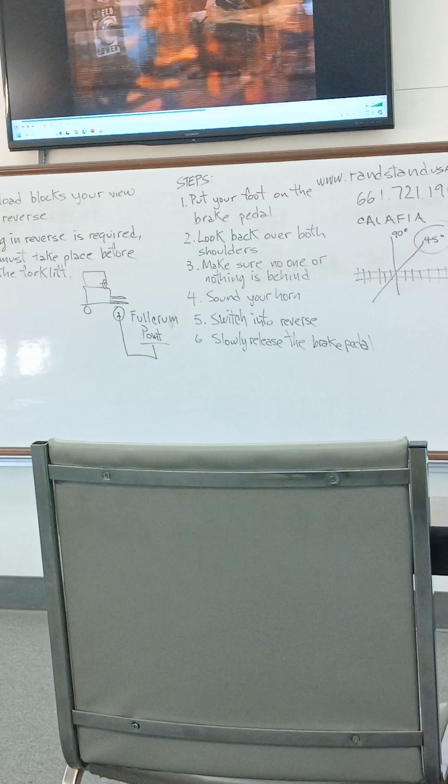Forklift equipment operators must be trained and authorized by the company. Once you're trained, evaluated, certified, and authorized, the rest is up to you. You're expected to have the maturity and responsibility to operate this equipment efficiently and safely.

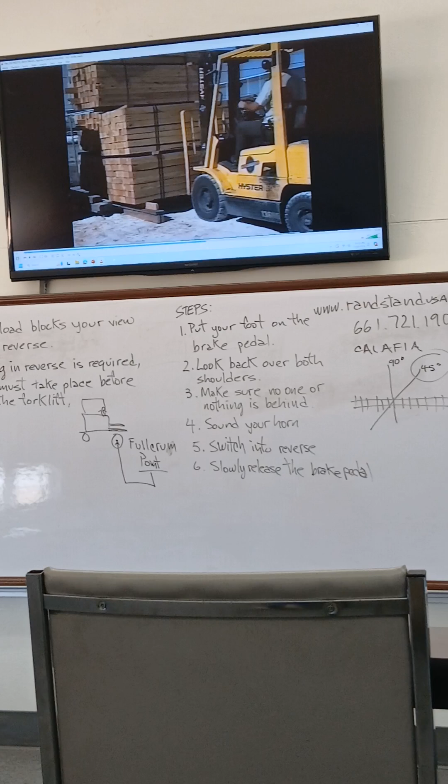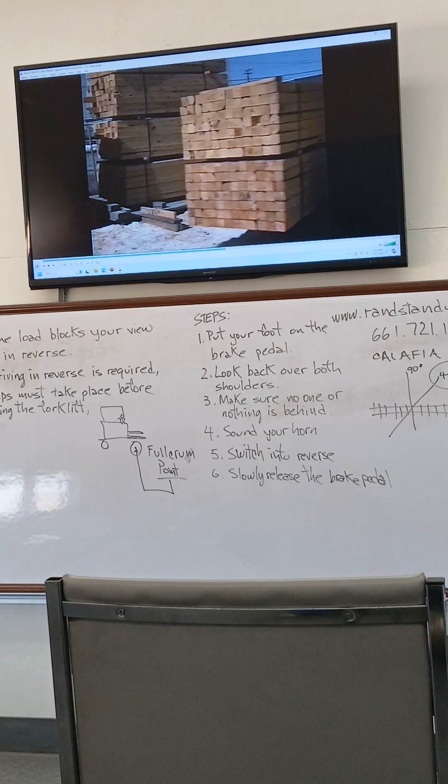Again, we can't cover every forklift safety rule, but let's explain some basic safe operating rules to provide the basics upon which to build a professional understanding of forklifts and forklift safety rules. Always follow your company's forklift operating procedures, policies, and rules.

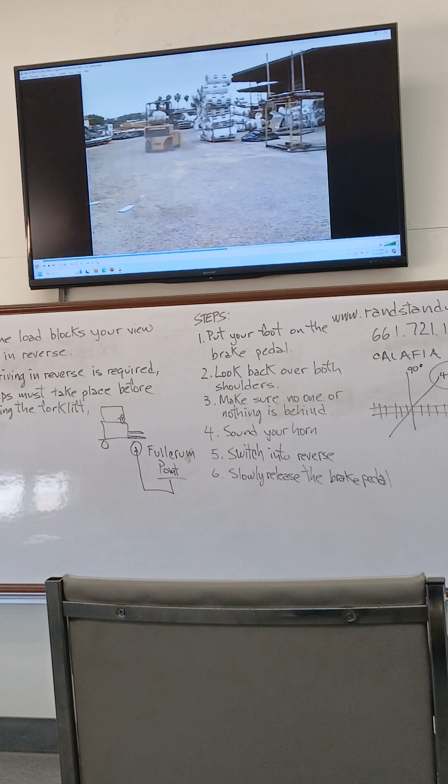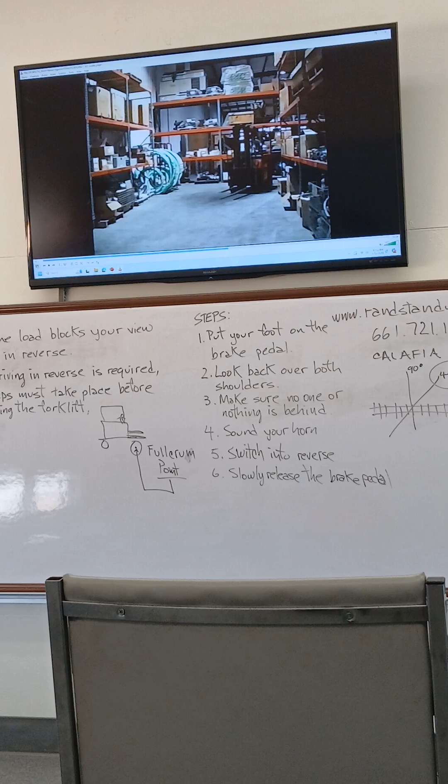Speeding. Let's begin with the most common hazard, that's speeding on forklifts. Forklifts are designed for operation at the speed of a person walking at a normal pace. You don't have speedometers on forklift equipment, but approximately 5 miles per hour is the maximum speed. You have to use your judgment on proper speed because in some cases, such as when turning or operating near pedestrians, 5 miles per hour may be too fast.

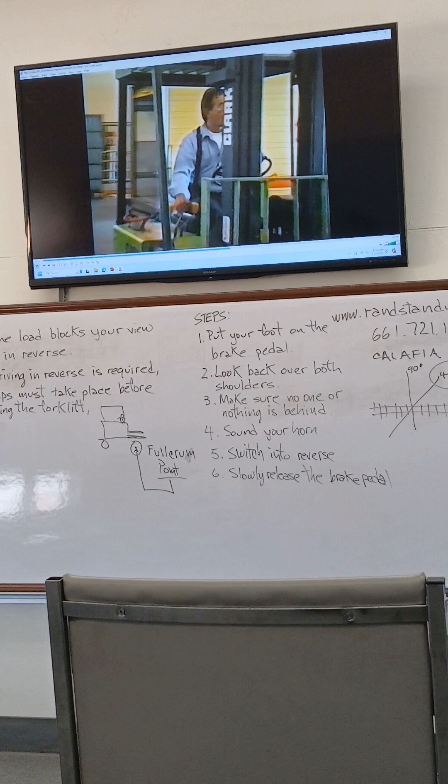It's okay to work hard and not waste time, but when you're operating forklifts, safety is the most important part of your responsibility. Main objective, safety first, safety last.

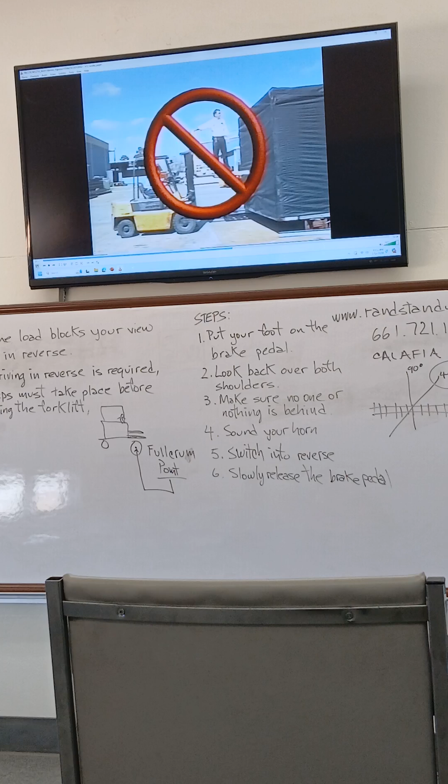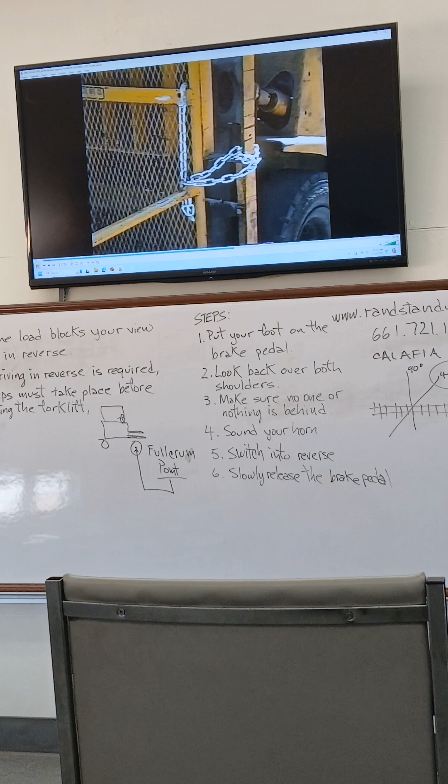Riders. Next, riders. Absolutely no riders allowed on forklift equipment. That includes riding near the operator, on the rear, sides, and certainly not on the forks or on a pallet placed on the forks. If you must elevate a person using the forklift, a proper platform must be used. The minimum safety requirement is the platform must be secured to the mast of the vehicle to keep it from falling or sliding off the forks.

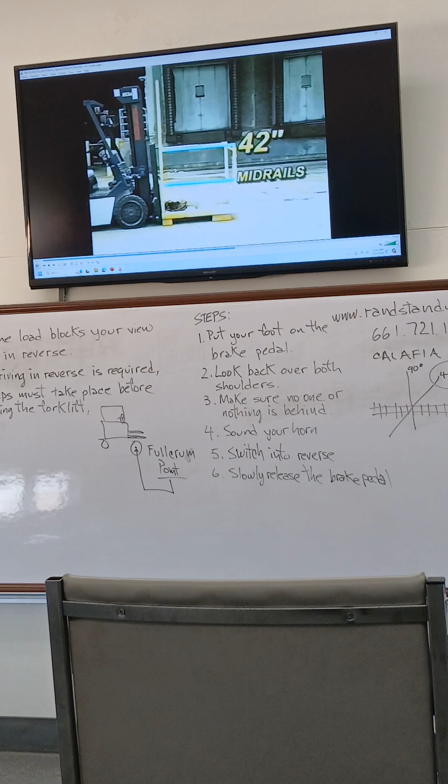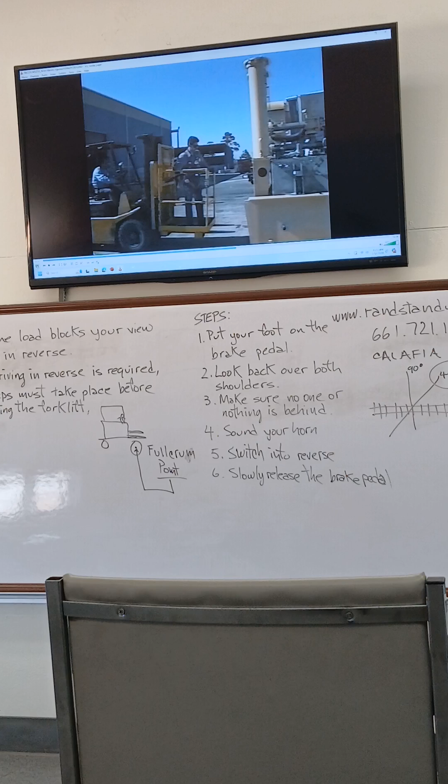The platform must have adequate flooring for good footing and must have 42-inch high guardrails and mid-rails. Some regulatory agencies require a 7-foot high protective guard between the person on the platform and the mast to prevent a person's hand or other body parts being crushed by the mast as it raises and lowers. When anyone is elevated on a platform, the forklift operator must remain at the controls whether the motor is running or not.

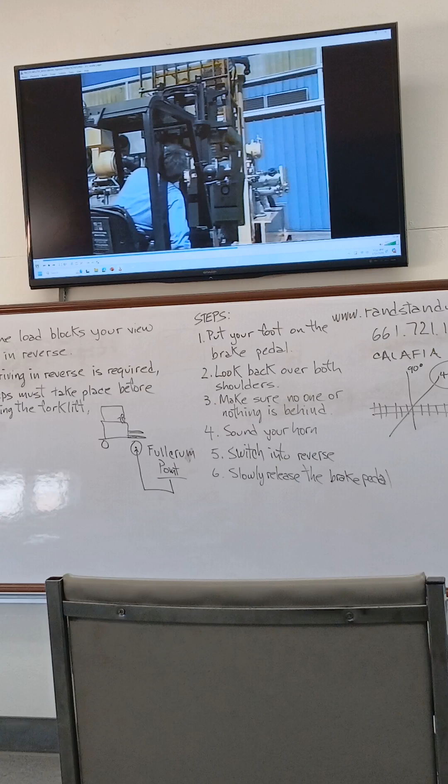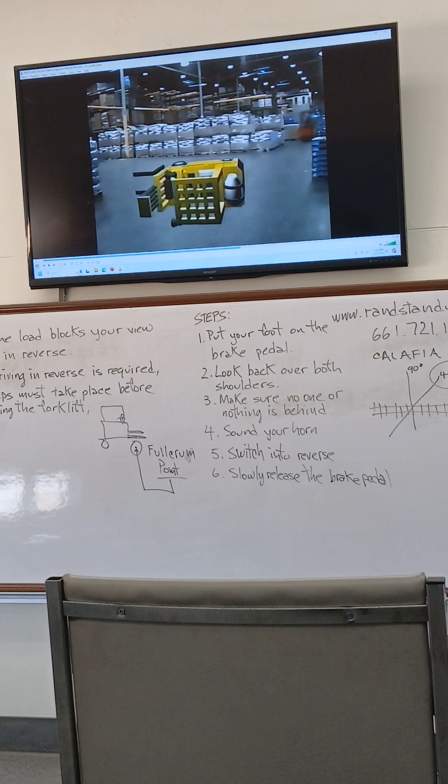Seatbelts and turnovers. Forklift manufacturers are not required to install seatbelts on forklift equipment. However, if seatbelts are installed, your company may require you to wear seatbelts. While we're on this subject, let's take a couple of seconds to explain some safety action that the Industrial Truck Association recommends if you are involved in a forklift turnover. It's up to your company to establish a policy relating to the action that you should take to protect yourself in case this occurs.

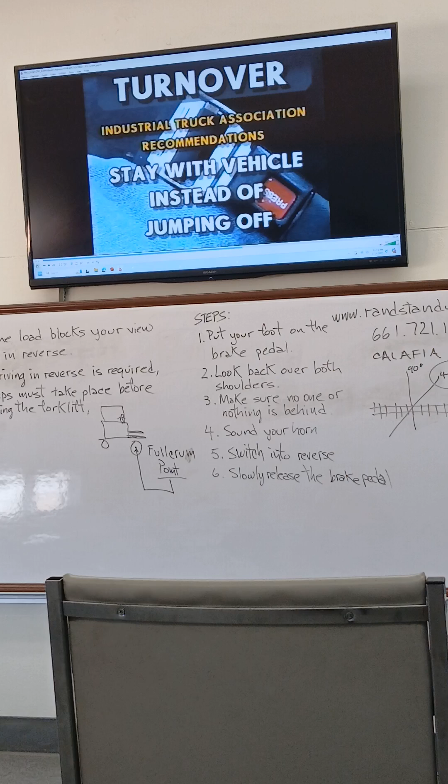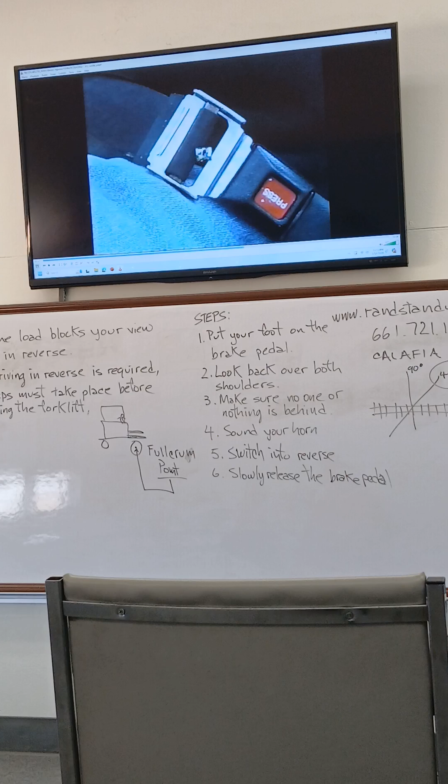The ITA states that studies on forklift turnovers usually result in minor injuries if the forklift operator stays with the vehicle instead of jumping off. The normal tendency is for a person to jump downward so the driver lands on the floor or ground, usually directly in the path of the overhead guard. In a tip-over of a sit-down truck, the operator should lean away from the direction of fall to minimize injury.

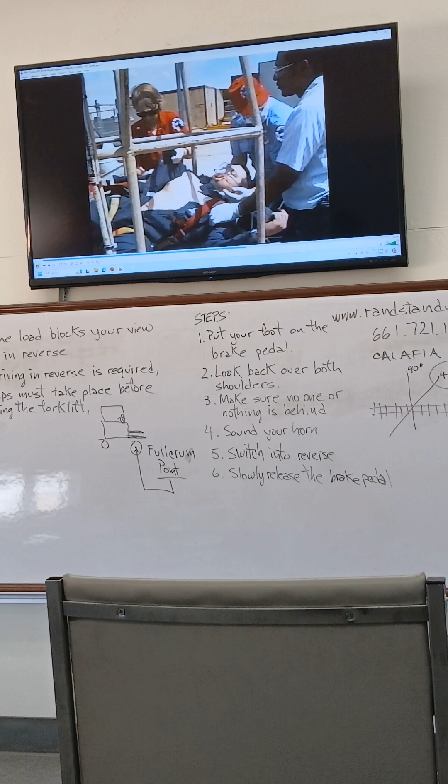The most common result in a tip-over, where the operator jumps out, is a crushing injury to the head, neck, or back where the overhead guard strikes the operator. 42% of forklift fatalities are caused by the operator trying to jump from a tipping vehicle. To keep this from happening to you, always remember to keep the load as low as possible and stay with the vehicle if it tips over. Wearing your seatbelt is the best safety measure.

On the other hand, in stand-up rider trucks, the truck operator can simply step backwards, perpendicular to the direction of fall, to minimize the potential for injury.

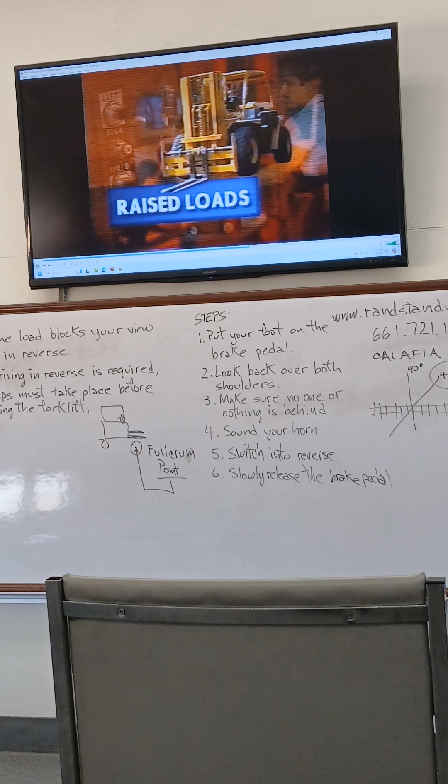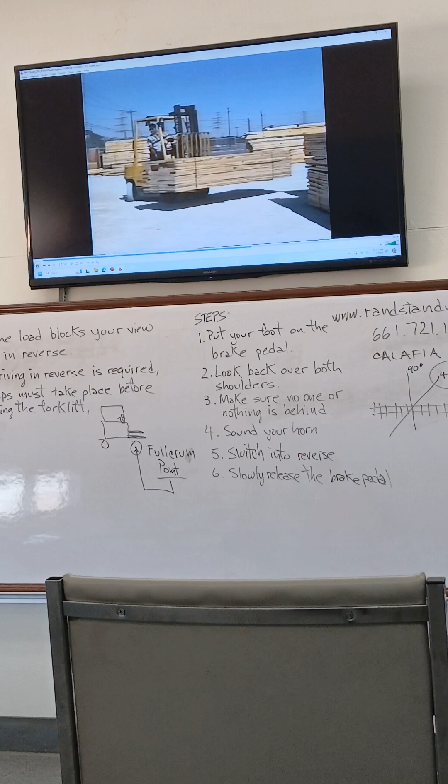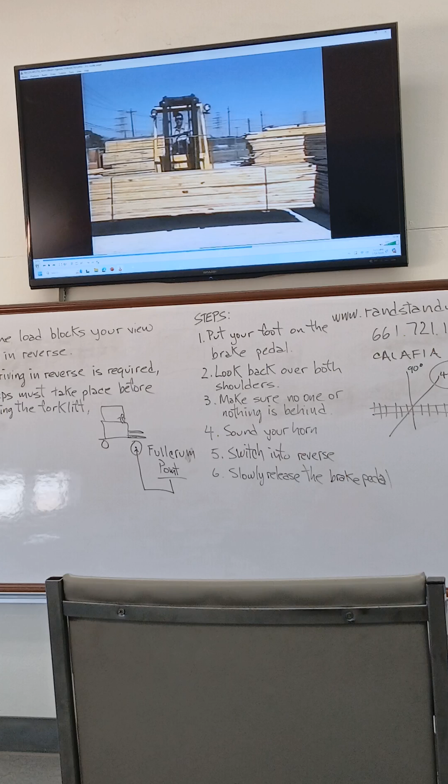Raised loads. Driving forklifts with raised loads is unsafe, as the center of gravity of the forklift and load changes as you move. When traveling with a load, keep the load as close to the floor surface as possible, which means the forks are raised about 2 to 6 inches off the floor. This prevents the forks from hitting the floor. Of course, if the floor surface is slightly bumpy, 4 to 6 inches off the floor surface may be preferred.

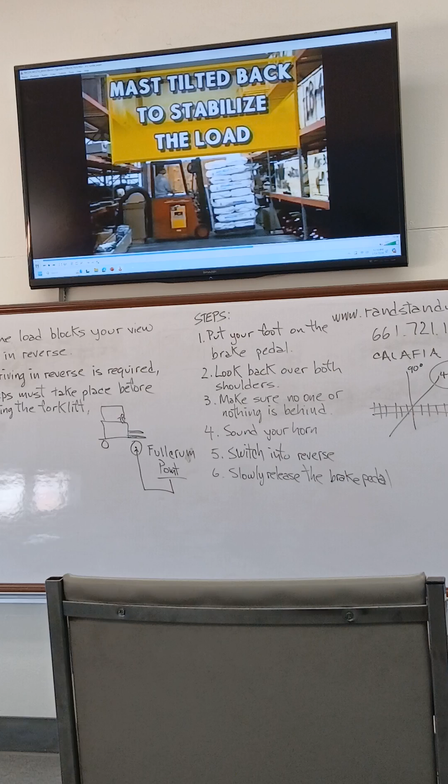In this position, the forks and mast should be tilted back slightly to help stabilize the load toward the mast and a better center of gravity. However, when you stop and are ready to elevate the load, move the mast back to the vertical or straight position. It's hazardous to raise a load when the mast is tilted to the rear or forward, since this can disrupt the longitudinal stability of the truck.

Never leave a forklift unattended with a raised load. Of course, never allow anyone to walk under a raised load. Keep pedestrians away when you have a raised load. When you have a person raised on the platform, it is recommended that pedestrians stay 1 foot away from the cage for every foot the cage is raised. This means if a person is raised 10 feet, pedestrians should stay at least 10 feet away from the raised platform.

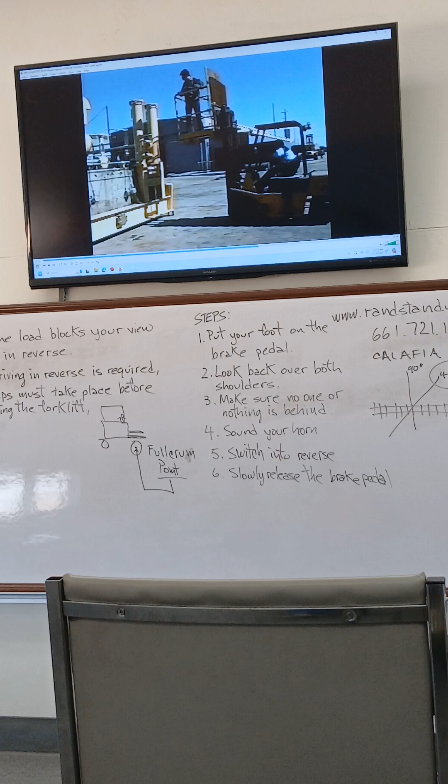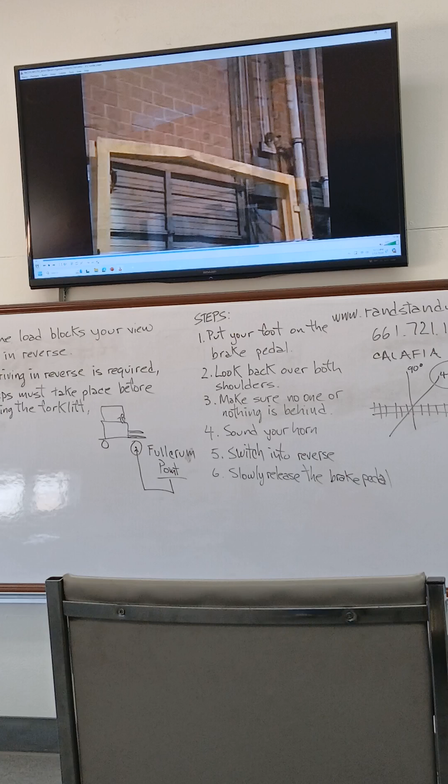When raising a load, such as positioning the load into a rack or storage space, think about the overhead. Will the load hit a sprinkler pipe or other object? Broken doorways, lights, and other objects are a result of equipment operators not watching where they are moving with a raised load. The red light should go on any time you're raising a load, and remember that raised loads should not be tilted forward, except when you're over a rack or tier ready to deposit the load.

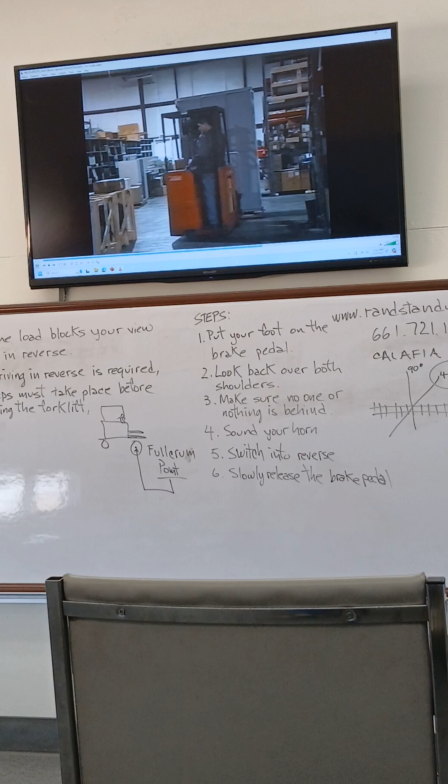While we're talking about maneuvering loads, if the load you're carrying is too high and blocks your vision, drive in reverse. Always look in the direction you're traveling. Many accidents have occurred because equipment operators weren't watching where they were going. Forks should always be placed under the load as far as possible, and never lift a load with one fork.

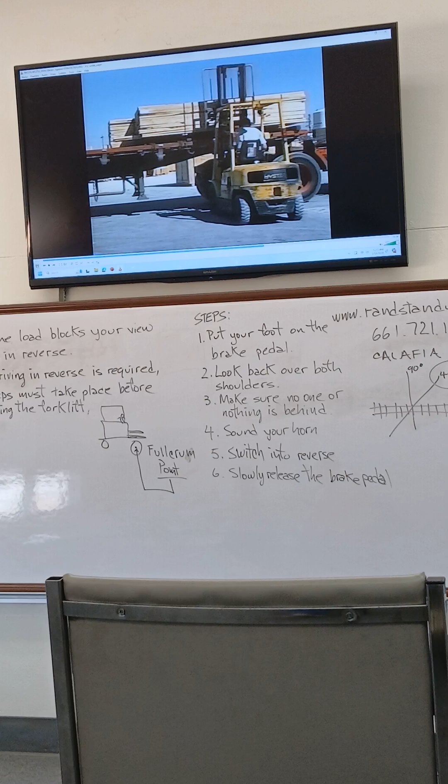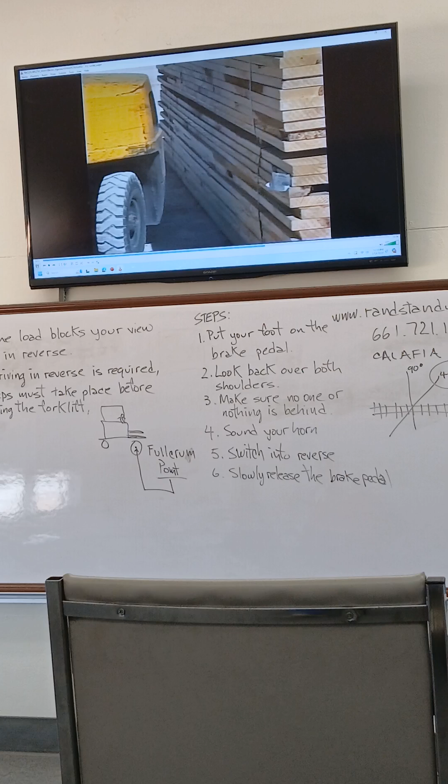Steering and operating surfaces. In tight spaces, watch out for the rear end swing. The rear tires are your steering tires, and it's quite easy to bump into walls, doors, and people if you're not watching the rear end swing. Be particularly careful when maneuvering in congested or tight spaces. The vast majority of property damage by forklift operators is caused by inattention to the rear end swing.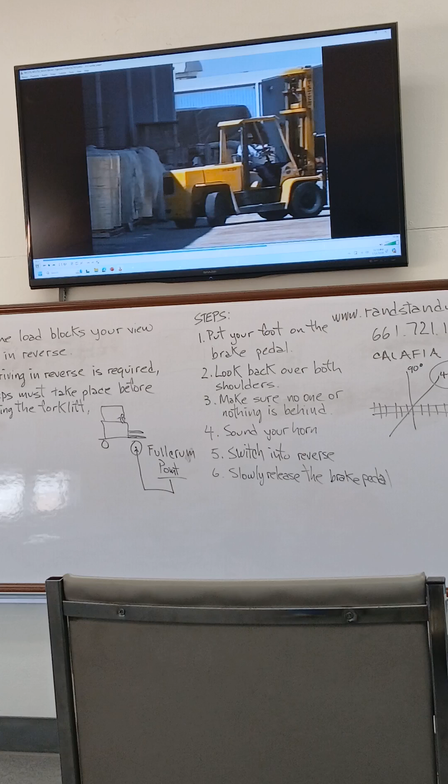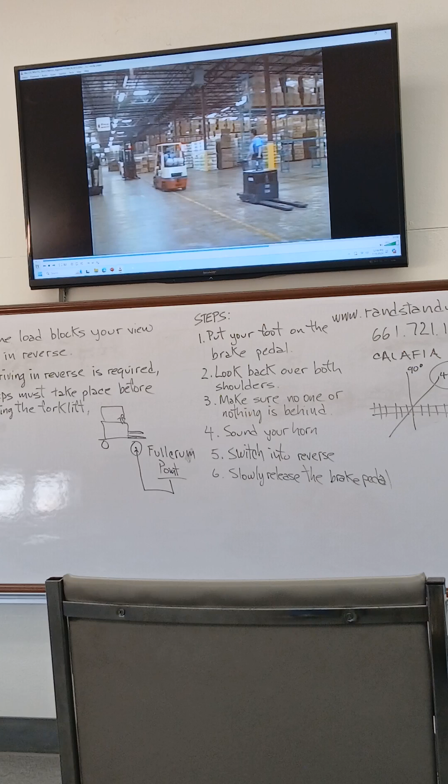Keep your arms, legs, head, and other body parts inside the running lines of the vehicle. This protects the operator from injury, especially when passing other forklifts and when maneuvering near storage racks and other materials. Never try to pass or overtake another forklift traveling in the same direction. Drive with both hands on the steering wheel, and of course, horseplay is prohibited.

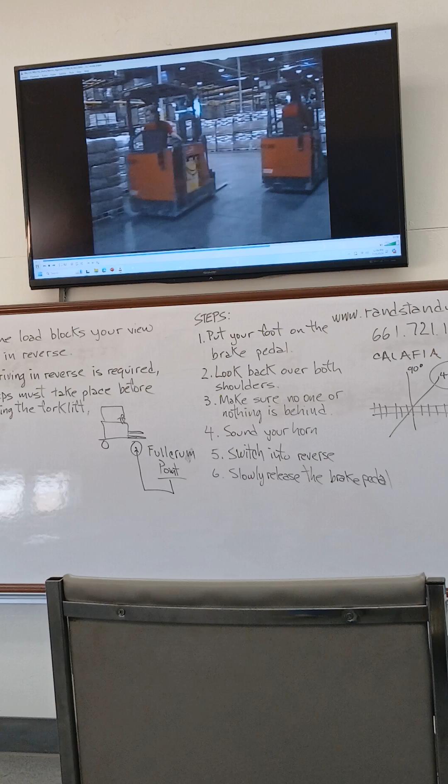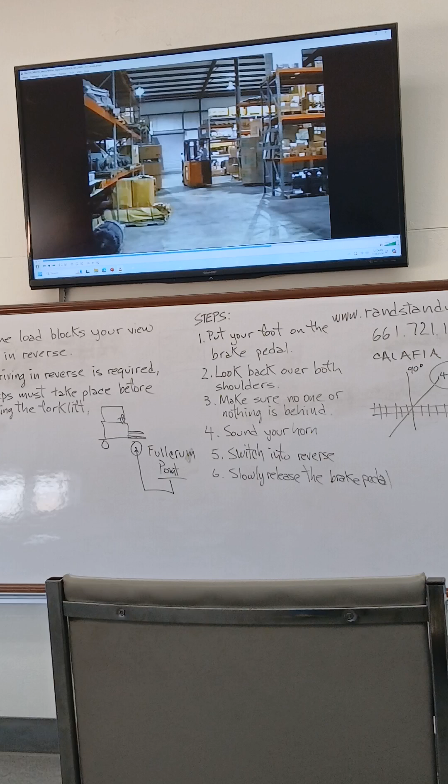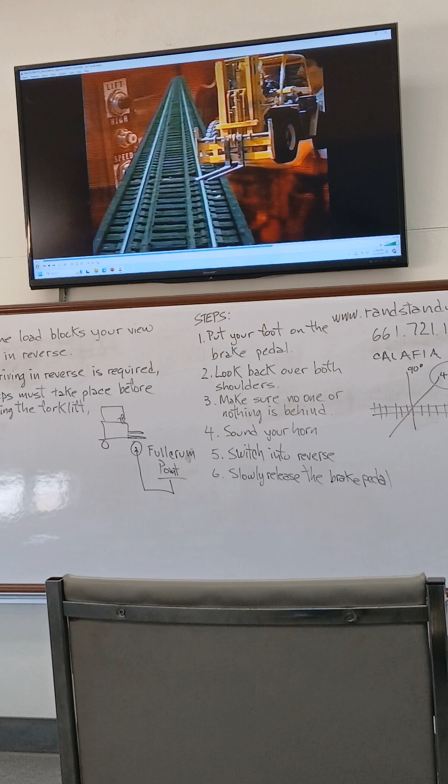Attachments to the steering wheel, such as spinner knobs, are prohibited. Never operate your equipment with wet or greasy hands. Naturally, floor surfaces should be clean, but if you encounter wet or damp areas, always slow down. Report any grease or hydraulic fluid leaks so the floor surface can be cleaned. If you operate forklifts over railroad tracks, always cross the railroad tracks in a diagonal position. This is the most stable position when crossing railroad tracks.

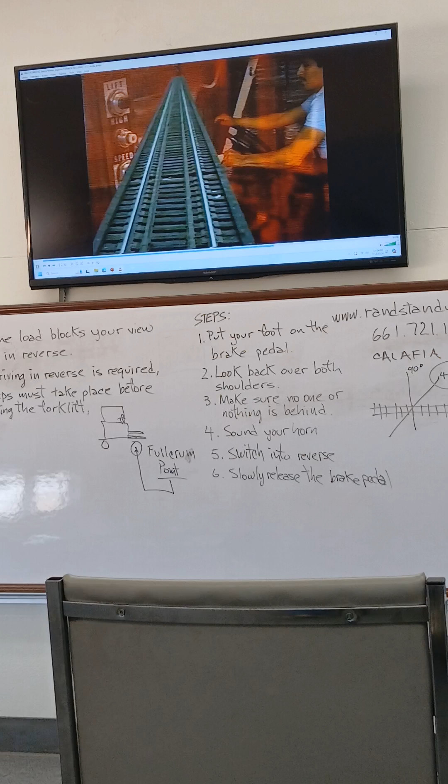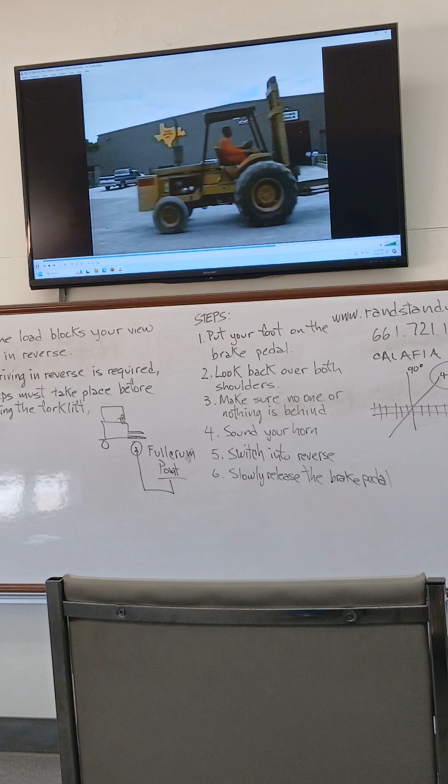Forklifts with solid type tires may only be operated on asphalt or concrete surfaces. Forklifts with pneumatic type tires may be operated only on asphalt, concrete, or improved surfaces such as gravel roadways. If forklifts must be driven on public highways, such as crossing from one location to another across the street, follow your company's policies and procedures while using extreme caution.

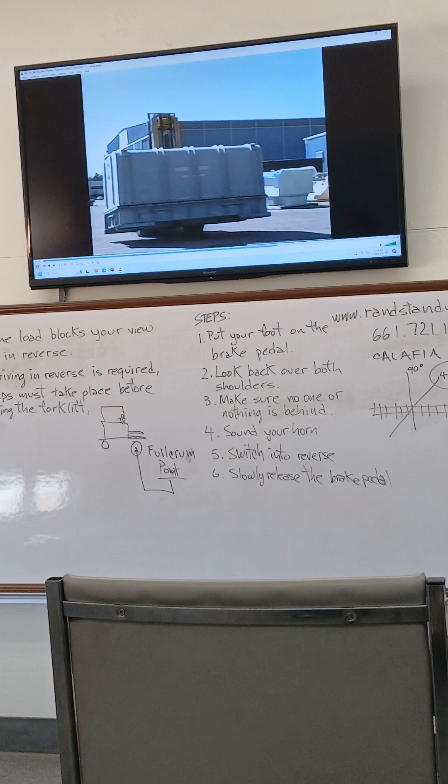Keep in mind that you're operating a forklift, which has a different steering system than automobiles. Many operators get confused in emergencies because of rear wheel steering and the vehicle being powered by the front wheels. Training and experience are the keys to safe steering of forklift equipment.

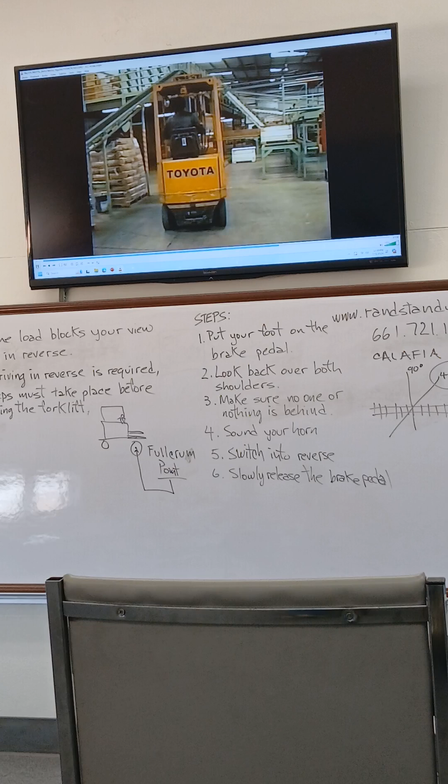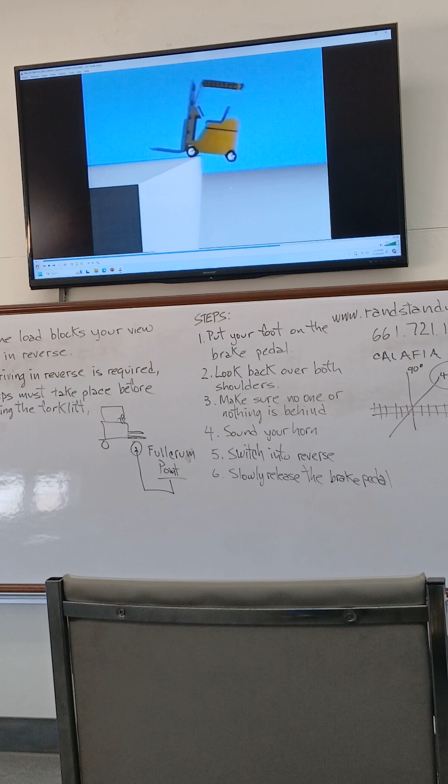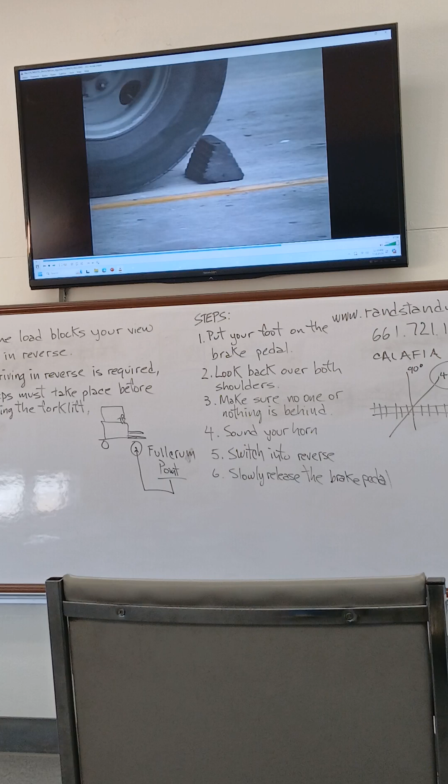Docks and ramps. On loading docks, keep forklifts away from the edge of loading docks. A slight miscalculation can become a nasty accident. Another good rule around loading docks is to always be sure trailer wheels are chocked and the truck is properly braked. If the trailer is disconnected from the truck, you may use a stabilizing jack to prevent the forklift from overturning the trailer. Dock plates provide a smooth surface over which to enter trucks and trailers.

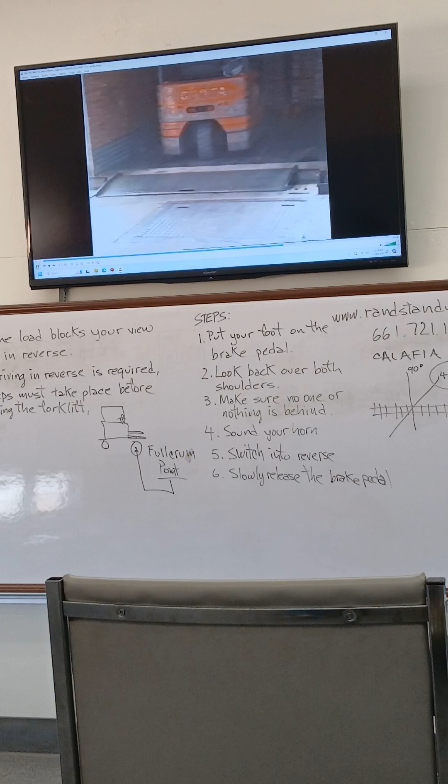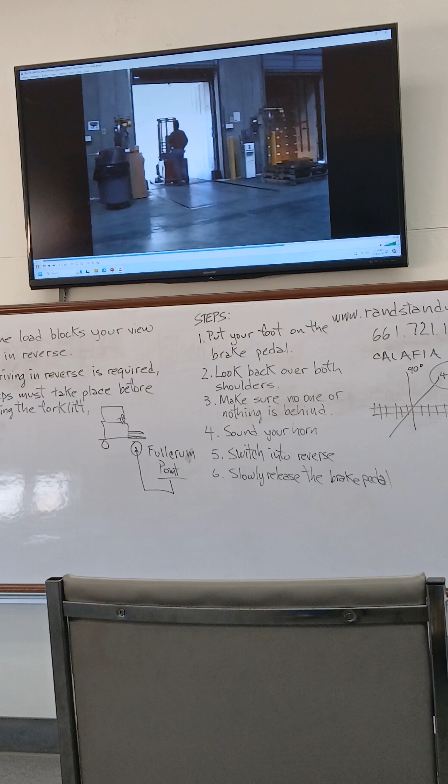Make sure the dock plate is in good condition and is properly placed between the trailer and dock to prevent movement of the dock plate. The lip of the dock plate must be fully seated onto the trailer bed. You should have good lighting inside trailers and trucks so you can see what you're doing. On ramps, the forklift safety rule is very simple. Keep the load upgrade when going up or down a ramp. Drive up, back down is the best advice.

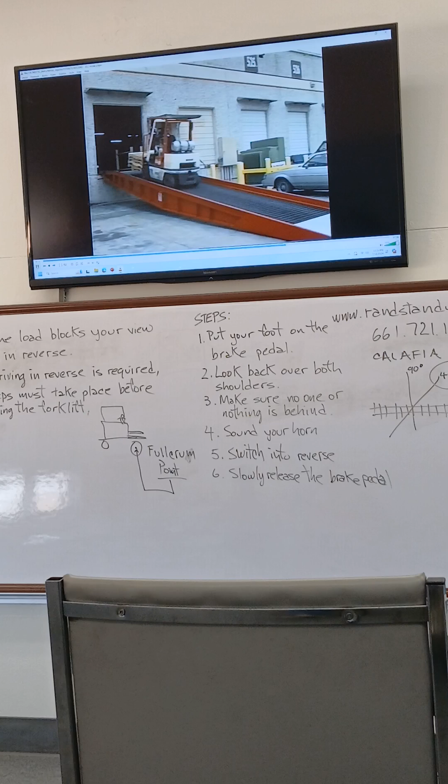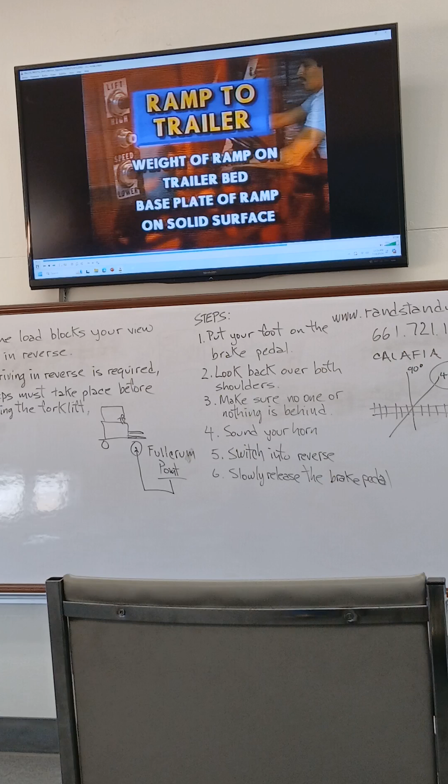If you're using a ramp onto a trailer, the weight of the ramp must be on the trailer bed and the bottom base plate of the ramp on the ground. Operators should maintain a safe distance from the edge of the ramp and drive at a creep speed. Of course, never overload any ramp or dock plate, so that means you should know the safe capacity of the ramp that includes the weight of the forklift and the load.

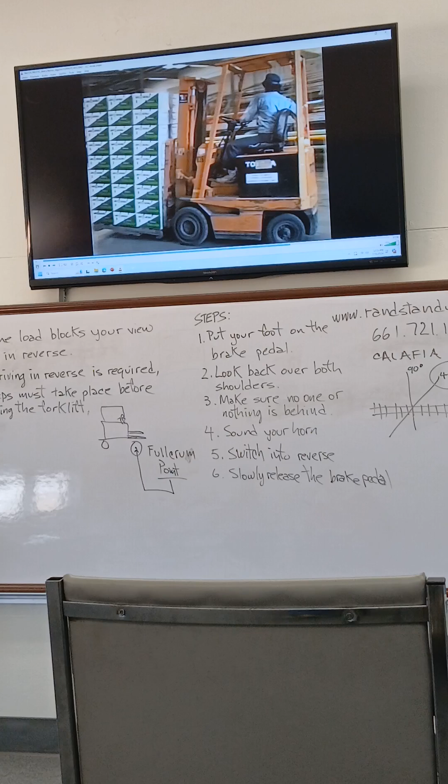Braking and parking. Okay, everyone is driving at a safe speed, watching where they're going, paying attention to others in the area, exercising caution when loading or unloading trailers and trucks. Now it's time to stop and park your vehicle. Basically, anytime you stop and get off your vehicle, the forks must be on the floor and the parking brake engaged and set. That's a minimum requirement. Forks must be on the floor and the parking brake set.

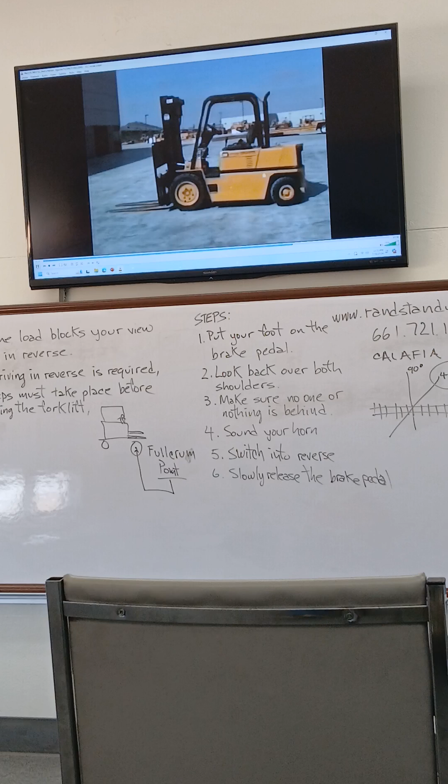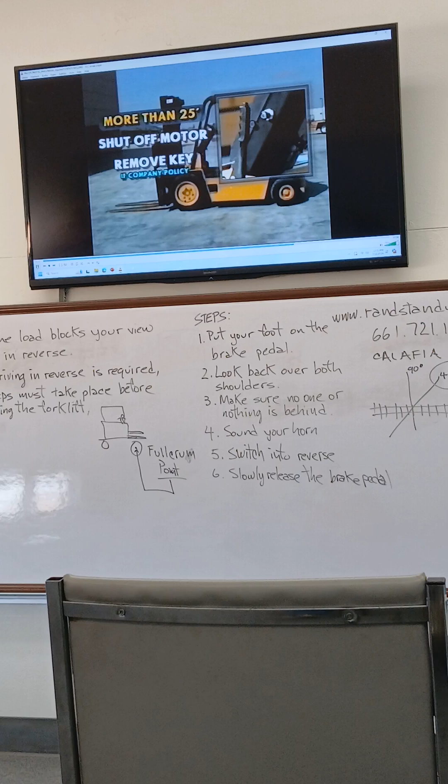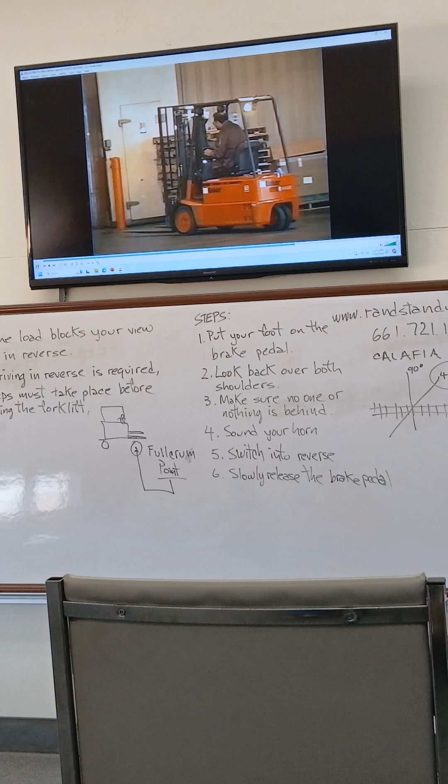If you're going to be away from your vehicle more than 25 feet, shut off the motor. Some companies prefer the key to be removed as well to prevent unauthorized persons from operating the equipment. Naturally, try to park the vehicle in such a manner as to keep the forks from becoming tripping hazards. Don't block valves or exit doors with your forklift or materials. Exit doors and electrical panels must remain unblocked at all times.

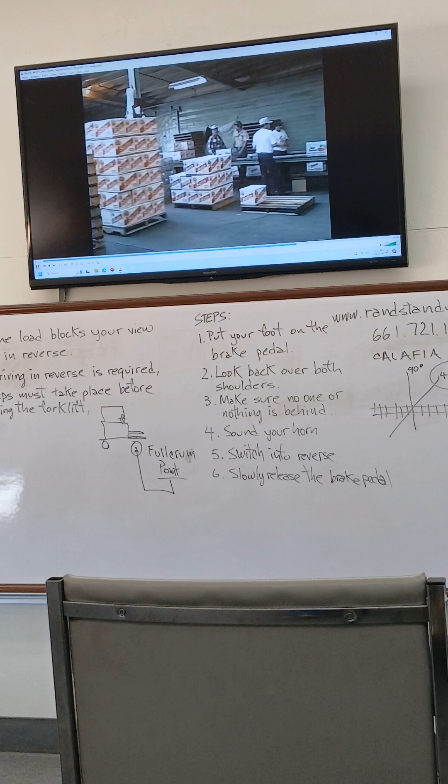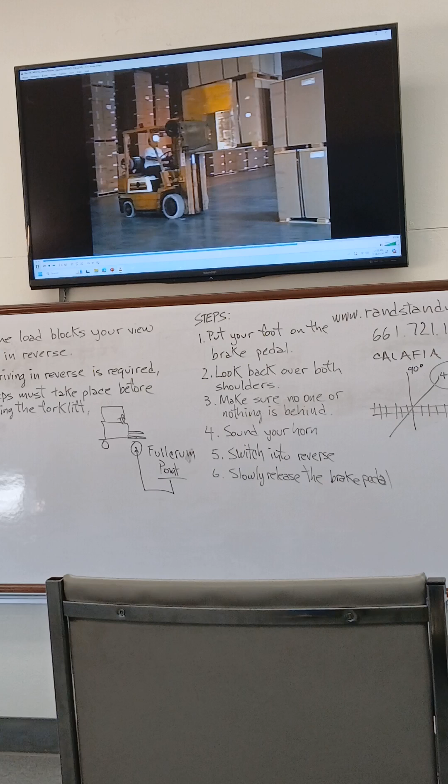All the things we've just talked about are nothing more than common sense and your good judgment. You're professionals. With experience and knowledge, all you have to do is apply basic safety to your daily operations and work habits, and you'll be on your way to better efficiency, productivity, and safety.

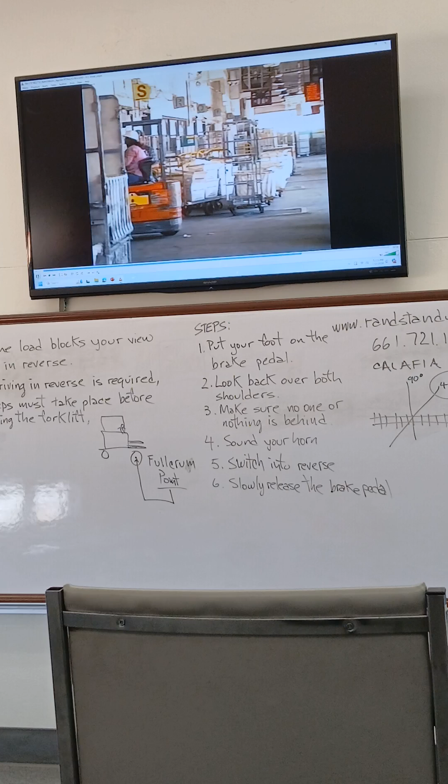Pedestrians. Forklift operators will tell you that one of their major complaints is pedestrians. Pedestrians don't pay attention to forklift operators. They walk out in front of forklifts and in general are safety hazards to forklift operations. It's not the fault of the forklift operators. Of course, these things happen, and people who work around or near forklifts but are not forklift operators should be trained also. They should be made aware that forklifts are noisy, and often operators can't hear pedestrians walking nearby.

Pedestrians have safety responsibilities as well, and this means paying attention to where you walk and being on the lookout for forklifts. Just as when you're operating a motor vehicle, pedestrians should be given the right-of-way. If someone walks in front of you, stop and allow them to pass. Sound horns around corners and aisleways. Operators should never drive toward any person who is in front of a fixed object or wall.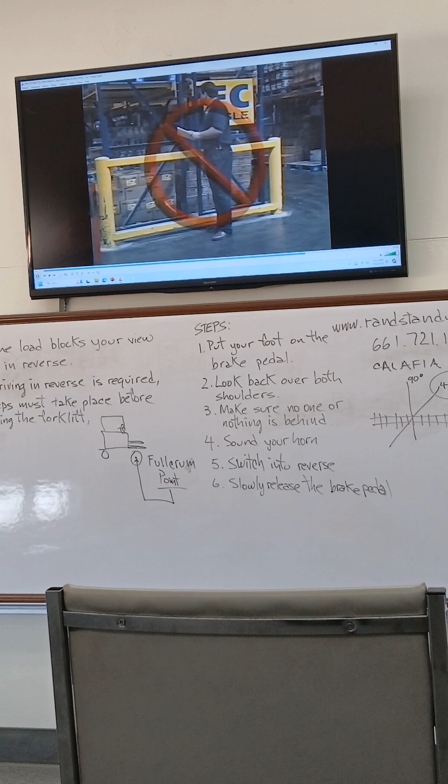Operators should always look in the direction of travel. If the load obstructs your view, drive backwards. Operators entering the building or nearing a blind corner must make their approach at reduced speed and sound the horn. Safety is a team effort, and it requires both the forklift operator and pedestrians to make safety a reality.